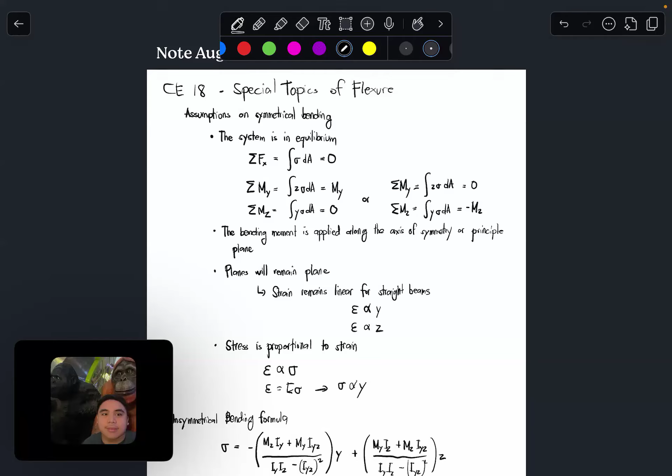So again, the assumption is that the system is in equilibrium. Meaning, if we were to analyze the stresses occurring upon a cross-section that is subjected to bending...

What happens is that if you integrate it with respect to its entire cross-sectional area, you'll be identifying fibers that are subjected to compression and fibers that are subjected to tension. We know for sure that those two are opposing forces. So if you sum the stresses, integrated over the area, you'll have an infinitesimal amount of force. Integrate that, and you'll have the total summation of force.

Under bending, there should be no resultant axial force — pure bending is what's happening upon your cross-section, so there should be no axial force. Therefore, our first equation is always the fundamental one. I believe for all of the special topics of flexure, this is something we cannot violate: the system must always be in equilibrium in terms of summation of forces.

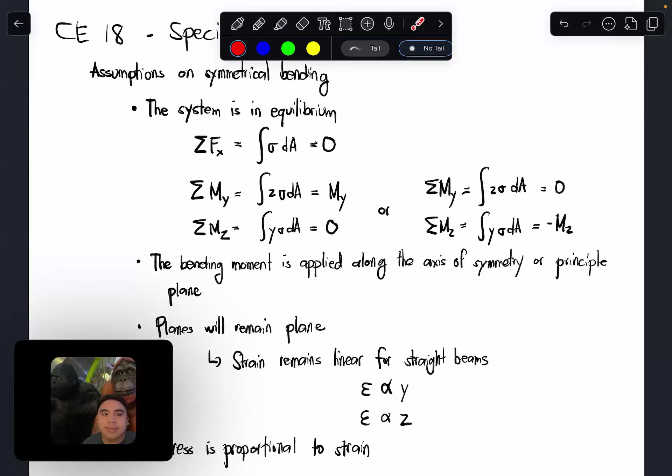Symmetrical bending involves the bending moment being applied on the axis of symmetry — for example, if your axis of symmetry is along the z-axis... or along the y-axis, whichever is the axis of symmetry.

If that's your axis of symmetry, and if your bending moment is only applied at the axis of symmetry, when you sum moments — considering z as your moment arm and sigma dA as your force — the collection, the culmination of the contribution of the stresses, should result into My.

On the other hand, since our bending moment is applied on the y-axis, if we sum moments along the z-axis, now considering y as our moment arm and sigma dA as our force, these should cancel each other out and eventually you'll arrive at Mz equals 0. In case the y-axis is your axis of symmetry, it's possible for both to apply.

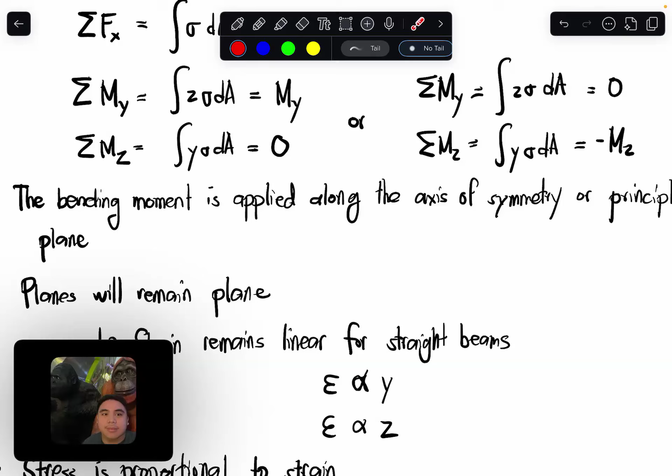On the other hand, if we sum up the bending moment along y, granted that the z-axis is our reference axis of symmetry, what we get will be equal to 0. Similar to the previous case, the fibers on the negative z side will just counteract the fibers on the positive z side. So that's our definition of symmetrical bending.

But we know now that we started in CE18 to depart from that assumption, that the bending moment is no longer applied along an axis of symmetry. Let me correct this - this is not the principal axis, this is our principal plane. We'll go back to this.

Another assumption would be that planes will remain plane after bending, if we translate that for straight beams. So clear emphasis on straight beam.

Knowing the Euler-Bernoulli formulation, our strain is determined to be proportional to its distance from the neutral axis. So that's what we mean when we say planes will remain plane and strain remains linear. It's a function of distance from the axis of symmetry.

It can either be, if our bending moment is along z, this is our proportionality - strain is proportional to its y distance from the neutral axis. Or if your moment is applied along y, your strain is proportional to its distance from the z axis. Lastly, stress is proportional to strain.

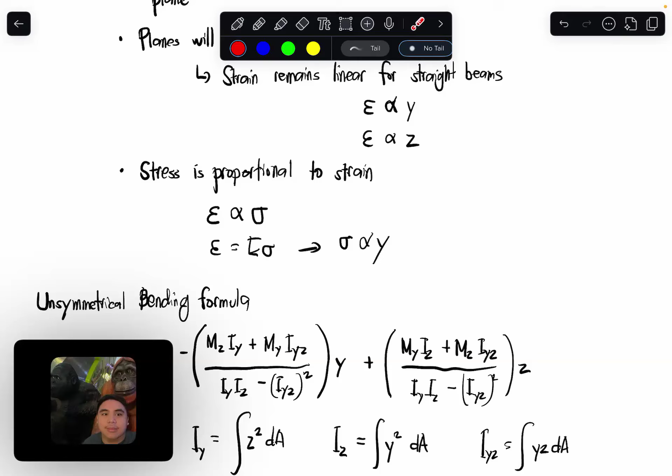As we deal with today's lesson, we'll cover unsymmetrical bending while also touching upon inelastic action. So when stress is no longer proportional to strain, what happens to our formulation? That's what we want to ask. So with these four assumptions, that's what constitutes our symmetrical bending.

Now, we have previously discussed this part in CE18 two weeks ago - this is the unsymmetrical bending formula, this very long equation. If you're given a cross-section, and again when it's not just along y and z that you're applying the bending moment, you can break it into its two orthogonal components, while at the same time it's not along the axis of symmetry or the principal plane where the bending moments are applied.

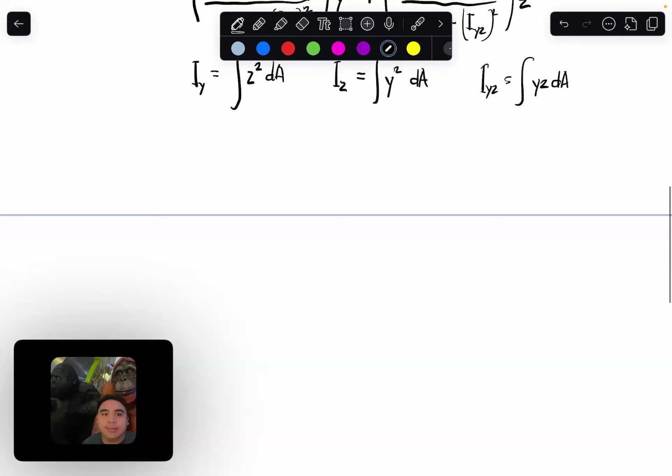Let's go back to translational transformation, which will result in the parallel axis theorem for both the moments of inertia and the product of inertia. So our translational transformation - the new axis y prime will be equal to y plus some displacement along y, or say you have z, which is z plus displacement along z.

So this translational transformation would result in the parallel axis theorem, where IY prime, our translated plane, will simply equal IY bar, which is our centroidal moment of inertia, plus dz squared times the cross-sectional area. Same with IZ prime, the translated plane equals the centroidal moment of inertia plus d squared y times A.

Similarly, we apply the same concept with the product of inertia: IYZ bar plus d sub y, d sub z, times A. So that's our translational transformation. But at the same time we also have rotational transformation.

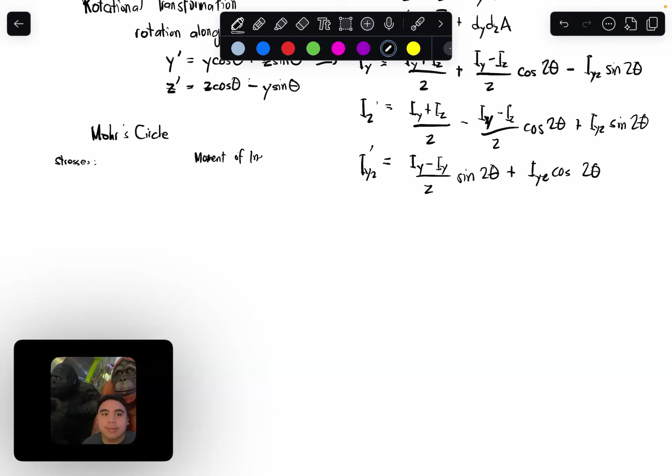Let me point out the key distinct difference between stresses and moments of inertia. For stresses, the particular difference is: this should be negative, this should be positive, this should be positive, this should be negative. The consequence of that, in the way we draw the Mohr circle on stresses originally from ES102, is that this is our normal stresses, and downward is the positive connotation for shear stresses.

Whereas when moment of inertia is what we're discussing, this is our moment of inertia, Iy and Iz. Then our product of inertia is upward like this, so this is our Iyz.

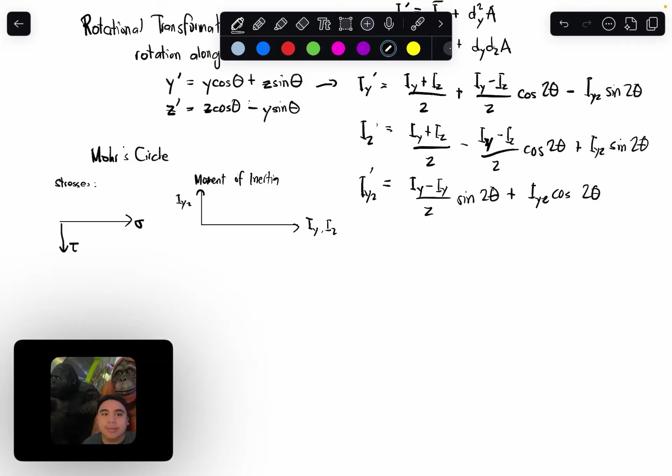But the manner of rotation still remains: counterclockwise is positive, clockwise is negative. So again, our definition of counterclockwise rotation, if we identify the positive x-axis here, the positive rotation is counterclockwise, then the negative rotation is clockwise.

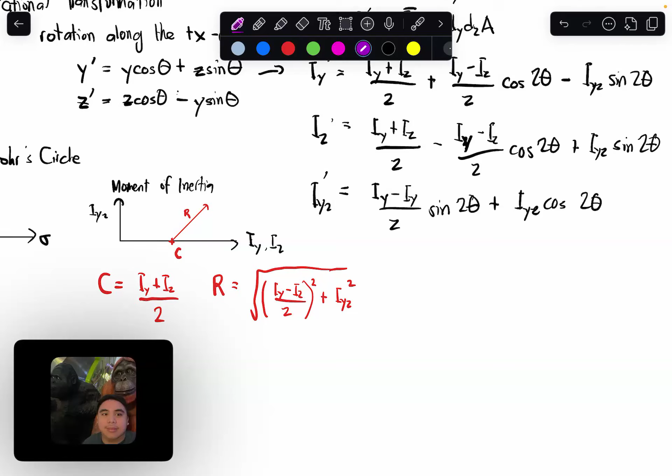And just like in our stresses, we also need to identify the principal plane. The principal plane is identified if either it's an axis of symmetry—automatically, once you identify the plane as somehow an axis of symmetry, you're dealing with a principal plane—or if the product of inertia diminishes to zero.

So we'll find this if we were to draw our Mohr circle right here, and see where our Mohr circle intersects the horizontal axis. So we are finding this point and this point, and the rotation you need now is what's called theta sub p, this is 2 theta sub p on our Mohr circle—the rotation needed to rotate R toward the horizontal. That's the angle you need.

And this theta sub p is already somewhat familiar to us. So theta sub p will be equal to—let me check this—let me ponder for a while. So we have negative 2 IYZ over IY minus IZ. Wait, there's a mistake, this is supposed to be tangent, not square root. So arctan of this one: 1/2 arctan of this quantity right here.

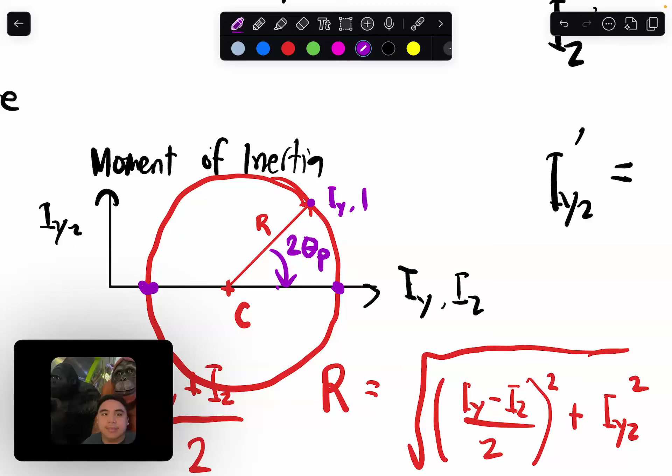Just in case na ito yung nangyari sa ating Mohr circle. Speaking of Mohr circle, as a bit of recap, this first point right here is yung ating IY, coupled with positive IYZ. Then yung opposite side niya is yung ating IZ na coupled with negative IYZ. So in this manner, in-establish na natin na si Y yung ating abscissa, si Z yung ating ordinate. Yung principal plane natin is identified through this axis of symmetry, kung saan IYZ is equals to 0.

Alam naman natin yung pag-interchange between these two concepts. Alam natin na kapag nasa axis of symmetry tayo, automatic yung ating product of inertia ay magiging equal to 0. Pero there are some instances na hindi natin madaling ma-identify kung nasaan si product of inertia natin, kaya hindi mo ma-identify kung nasaan yung ating axis of symmetry. So hindi straightforward yung pag-alam kung saan nagsi-zero si product of inertia.

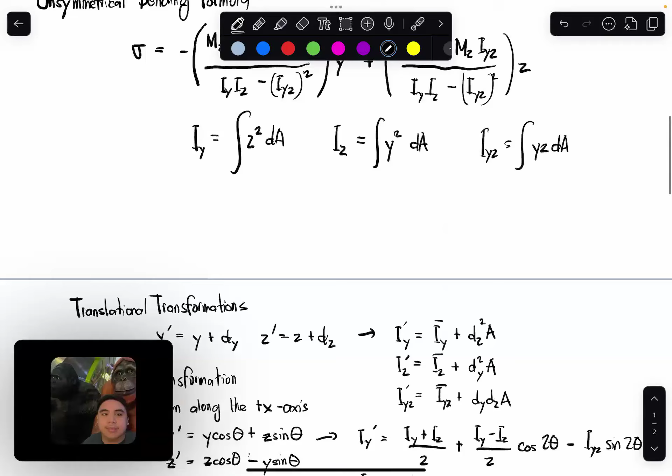At ngayon, we arrive at the notion ng ating neutral axis. Yung neutral axis natin, per definition, is the plane on which any values, kung ano yung nilagay mo na values ng y at saka z, automatic magiging zero yung ating bending stress. So ito ay dapat maging equal to zero.

And to visualize this, kung paano natin dinederive yung formula, i-imagine mo kailangan yung plane. Unahin mo yung plane, meron kang y, tapos meron kang z dito. Yung y mo is yung abscissa, z mo is yung ordinate. Parang meron kang ganito, so yung neutral axis mo din will be identified by some angle beta.

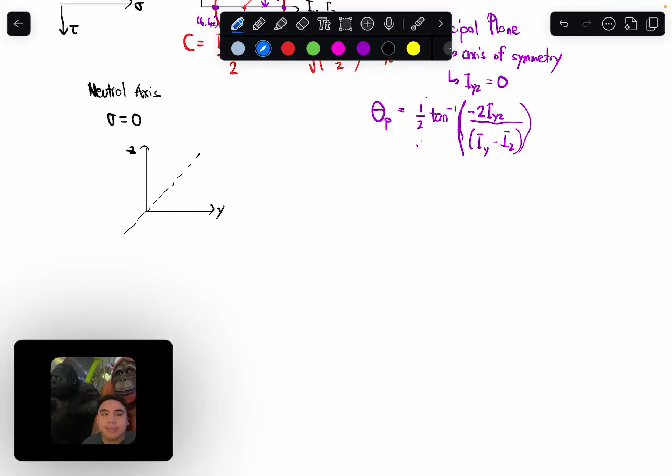Ngayon, depende kung paano mo i-define yung beta. Sa study guide, yung beta ay from the positive z towards y, so ito yung in-identify niya na beta. For many of the exercises naman, as long as sinasabi mo kung saang axis nag-originate siya, maski kung positive y yan or kung positive z, okay lang naman din.

So paano mo ngayon makukuha yung beta? Beta can be obtained by knowing, so palitin natin, ito yung beta mo ngayon, then i-imagine mo na siya ay isang right triangle. Meron kang right triangle right here. Ngayon, what you've determined is ito yung opposite, ito yung adjacent mo. Yung coordinate niya along y is yung opposite, yung coordinate niya along z is yung adjacent.

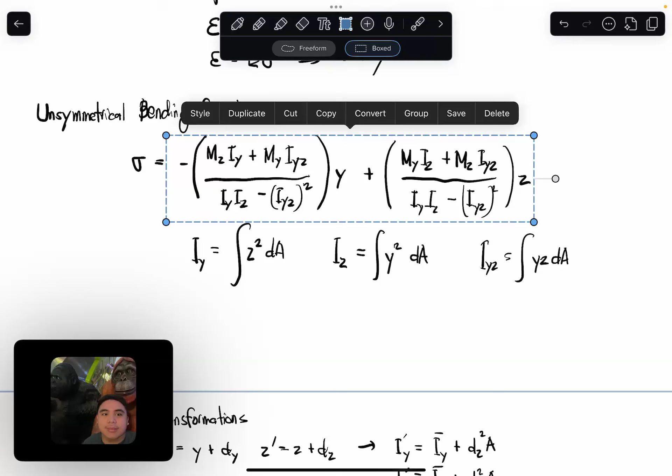Knowing yung tangent formula, meron kang tangent of beta is equals to y over z. So parang from this moment on, kailangan mo lang ngayon i-program yung sarili mo paano mo ma-manipulate itong equation na to such that yung nasa left-hand side ng equation ko ay magiging y over z.

Babalikan natin to. Again, per definition, gusto natin na equal to zero yung ating bending stress. So through some manipulation, copy ko na lang para alam natin yung thought process, paano ba siya nangyayari down the line. Meron kang 0, at ito ay malilipat lang sa kabila, magiging positive siya. Tapos gagawin ko is yung coefficient na kasama ni Z ay i-divide ko with respect on both sides of the equation. Pero prior to that, ang pwede ko nang magawa is i-multiply both sides by the denominator ng fraction. Itong buong term na to, since pareho lang naman sila ng denominator, pwede mong i-consider na nag-cancel out na. Therefore, kahit yung numerator na lang pala yung ima-mind natin dito, yung mga numerators niya. Divide natin both sides by the numerator na kasama ni Z dun sa equation.

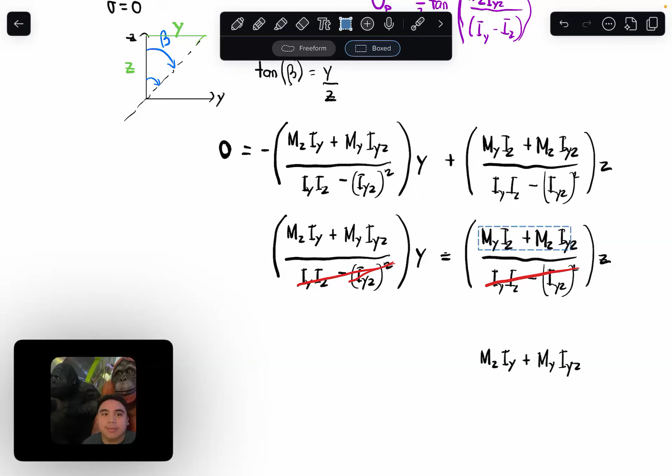So if we were to do that, mangyari lang is meron ka nito, copy, paste, then baliktad pala, dapat pala ay y over z. Yung numerator pala ni y, yung i-divide natin on both sides of the equation. Tapos ito ngayon ay mapupunta as numerator dito, numerator sa dyan, equals to y over z. So ito ngayon yung ating formula na kailangan nating ipagsama dun sa nakuha natin dito, itong tangent beta na ito.

So kapag gusto natin makuha ngayon si beta, all we need to do is to get yung arctan ng nakuha natin na term. So ito, yung arctan nito will be yung ating beta.

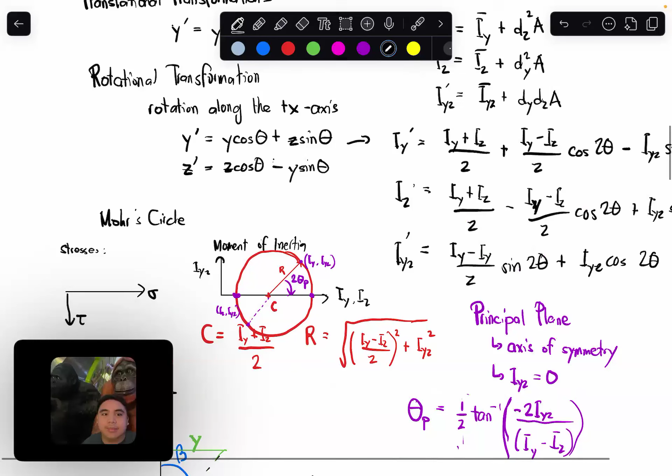So you have two options when dealing with unsymmetrical bending. You take the plane as it is. You obtain the moments of inertia along the Y and Z. We also get the product of inertia. You plug everything in, all of the coordinates, then you'll get a value for sigma.

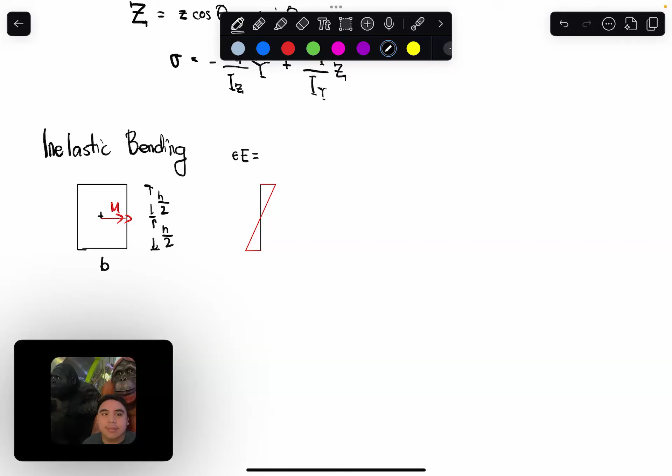Our strain diagram will look like this. Then with all the formulations we've done, we know that within the elastic limit, epsilon times E equals sigma. If we convert this strain into stress, it remains the same proportionality, so you have epsilon compression, epsilon tension, and this becomes sigma tension - the maximum tensile stress, plus the maximum compressive stress.

And the definition of our neutral axis doesn't go away - it's where our strain is zero, and at the same time where our stress is zero.

Per definition from ES 102, we get MY. So assuming, sorry, let's do this along Z. So this is the Z axis. So you have MZ over I... let's make this M sub Y. But let me remove the Y first.

Let's go back to the key definitions we learned from ES 102, for example, we identify Y as the distance from the neutral axis. And I NA is our moment of inertia along the neutral axis.

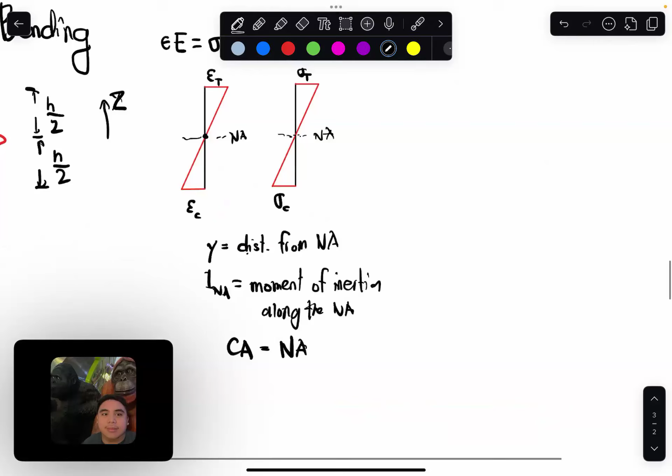But at the same time, we know from ES 102 that our centroidal axis is coincident with our neutral axis if and only if the following is satisfied: stress remains proportional to strain. We'll flesh this out later. But for now, we're still dealing with a doubly symmetrical rectangular cross-section, so in this scenario, the neutral axis remains at the centroidal axis. But otherwise, let's continue the thought.

So let's take a detour into the notion of abscissa and ordinate. For example, given this: you have X, you have Y. So X cross Y yields positive Z, meaning the direction of Z is away from the page. This just means that counterclockwise rotation is positive and clockwise rotation is negative.

If in case this is flipped - you often encounter this where this is Y and then suddenly it becomes X - when this happens, the vector normal to the plane will be directed towards the page.

So in this manner, yung direction ng rotation mo, halimbawa with reference sa theta p, sa beta, yung pag-identify mo will be in a manner such that yung counterclockwise rotation will be negative rotation from our perspective, then yung clockwise rotation yung magiging positive na rotation. Kasi halimbawa sa book makakita tayo ng ganitong example. Meron kang ganitong plane, makikita mo ito si Y, ito si Z. So sa unsymmetrical bending ganito yung orientation mo. Y cross Z yields positive X, at yung Y cross Z natin yields a counterclockwise rotation, at yun ang pointing away from the page yung direction ng ating positive na rotation. So tama lang na yung abscissa mo is Y, then yung ordinate mo is yung Z.

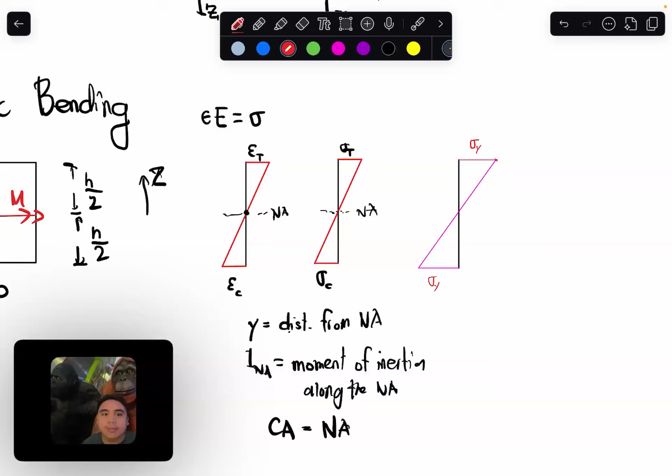So meron kang sigma y dito. Yung nagko-cause ng ganitong instance, mabilis lang natin siya ma-define kasi we know that this is h over 2, or we say na kunwari y max, we identify this to be equal to y max. So yung farthermost fiber, typically proportional naman talaga siya doon. Kung mas malayo siya from the neutral axis, mas malakas yung bending stress na nakukuha. So ito yung ating neutral axis.

So now that we have identified yung y max, meron kang sigma y dito, tapos equal to yung moment na gusto mong malaman, which later papanghalan natin, y max over INA. So kung i-jumble natin to a little bit, such that yung M na gusto nating ma-determine, meron kang sigma y, which is your yielding stress, INA over y max.

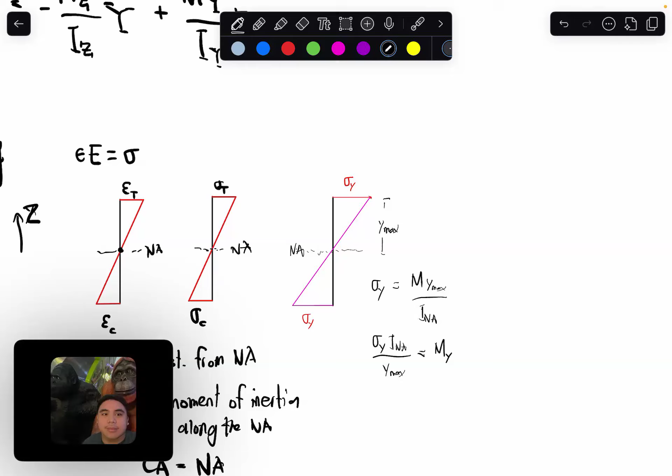This is equal to what's called yung yielding moment. So, yielding moment is any bending moment when applied upon a cross-section will cause the farthermost fiber to experience the yielding stress. Yun yung formal na definition mo. So basically, ito na yung boundary na any greater than this, any greater than M sub Y, ay magiging inelastic na yung action. And we roll back again dun sa notion ng inelasticity.

So we go back to our stress strain diagram. We have here our stress, we have there yung strain. We know na within the proportional limit, stress will remain linear to strain right here. So ito yung idealization natin.

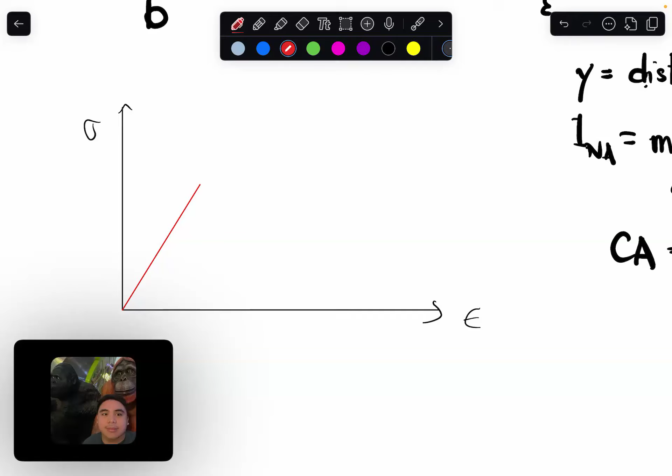Then there comes a point, na-discuss na a little bit, na merong residual stresses, medyo magko-curve ng ganyan, then magre-reach ang ultimate stress, magkakaroon ng necking, then magbe-break siya kapag umabot siya dun sa ultimate, so bababa yung relationship between stress and strain. So ito ay yung tinatawag natin na proportional limit, at ito yung ating ultimate stress right here.

Pero for CE18 and CE151 purposes, we idealize itong behavior ng steel natin, or any other material. We are establishing what's called a perfectly plastic material. Kapag perfectly plastic siya, what we are assuming is once it reach yung ating proportional limit, yung sigma sub y or yung epsilon sub y, so yan yung ating proportional limit, any further than that, constant na siya.

So nagpa-plateau na siya, and yung plateau na yon is yung sigma y. Ibig sabihin, any strain that is greater than epsilon sub y, kapag kinonvert mo siya to stress, it will always result in sigma y.

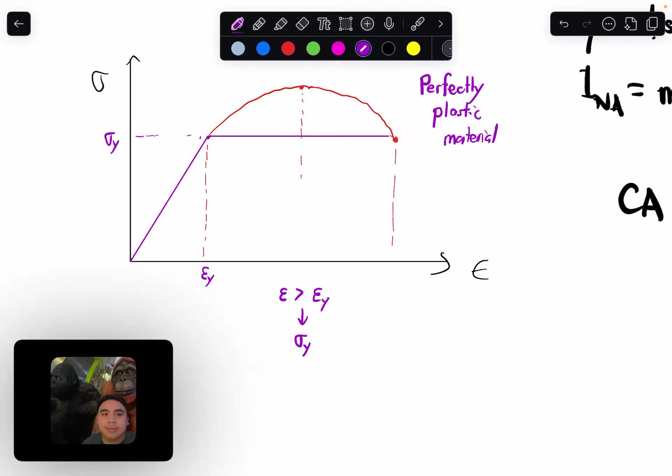So yun lang yung sinasabi natin kapag perfectly plastic material. Babalikan natin to. Now we are proposing na yung same na rectangular cross-section natin will be subjected under bending action, such that yung magiging resultant na strain distribution niya across your cross-section, even though if it is still linear, hindi naman na-violate yung rule, so kahit na linear yung relationship niya, yung strain mo ngayon dito, yung maximum strain is greater than the yielding strain. Similarly, since linear naman to, ito ay still greater than dun sa yielding na strain.

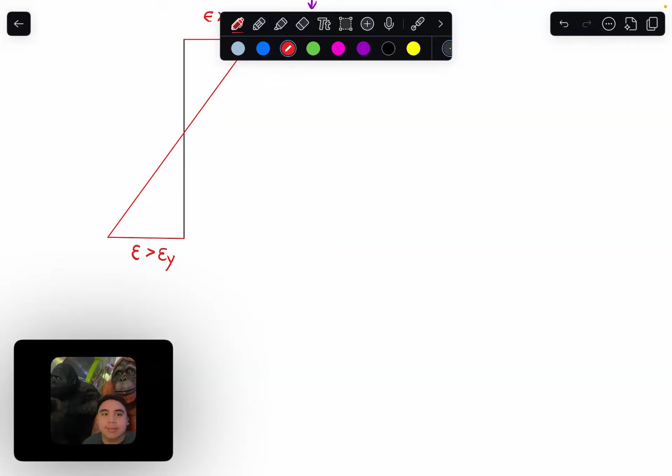So mas malaki pa rin yung strain natin. Sabihin natin na negative epsilon sub y, tas yan, positive epsilon sub y, it's still the same distance, pero meron ka pa rin H over 2 dito. Although not to scale ito. Sige, H over 2 right there. So meron kang maximum strain na greater than dun sa yielding na strain. So what to do at this point?

Kailangan mo lang muna i-identify hanggang saan dun sa mga fibers na yon yung nag-exceed ng yielding na strain. So sabihin natin na up to this point, ito ay yung magre-result to yielding strain. So yielding strain siya at this point, at the same time, at this point, yielding strain din siya. So ini-impose lang natin na alin pa rin yung magre-remain na linear, alin yung magre-remain na non-linear. So this is our strain distribution right there.

At kung ililay down natin yung manner ng conversion, kino-convert na natin siya to stress and strain. Babalikan lang natin tong ating stress-strain diagram. Ang titingnan natin is yung not in red, but rather in violet. So unahin natin yung farthermost point, yung very extreme na point. So yung nakuha natin na sigma is around dito.

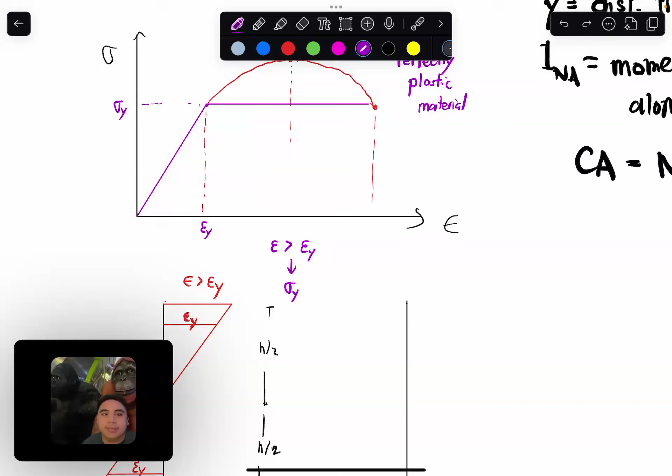Nalagpas siya kay epsilon sub y. So lagpas yung strain mo dun sa yielding na strain, pero sinabi natin na any strain that is greater than the yielding strain, if converted to stress, will remain at sigma sub y. So at that point, makukuha natin, sigma sub y pa din yung ating conversion. Similarly, for the rest of this portion right here, ganun din yung magiging manner ng conversion. It's still sigma sub y.

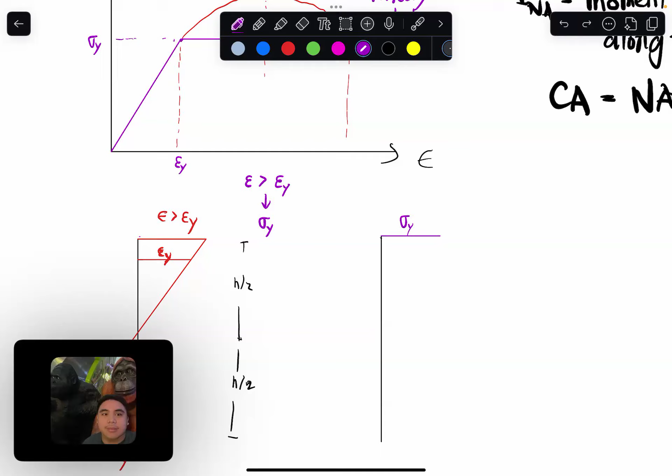So parang magiging constant lang yung sigma sub y natin for some distance right here. So for some distance, sigma sub y. And after that, magiging linear na yung relationship between stress and strain. So magiging linear na siya na ganito.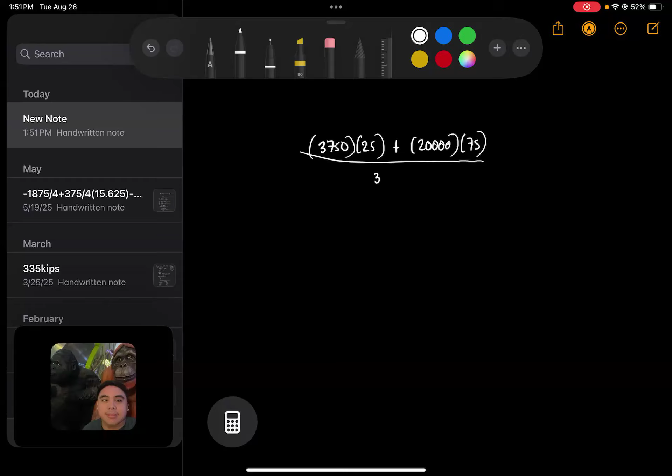Labo 3,750 times 25 plus 20,000 times 75 divided by 23,750. So ay equal to 67.105. So ito yung location ng ating centroid.

Lahanin lang natin yan. Next is to get yung moment of inertia. Unahin muna natin yung centroidal moment of inertia ng isa. We know that it has a height of 50, then a width of 170. So meron akong... sige, 75, sorry, 50, balikan ko lang to. Yun, 75 na.

Yun. 50, 75 times 50 raised to 3 over 12. Ito yung ating sa una. Tapos yung I2 natin ay equal to, so dito ko lang isulat para hindi malito si Apple Calcu na 400 times 50 cube over 12.

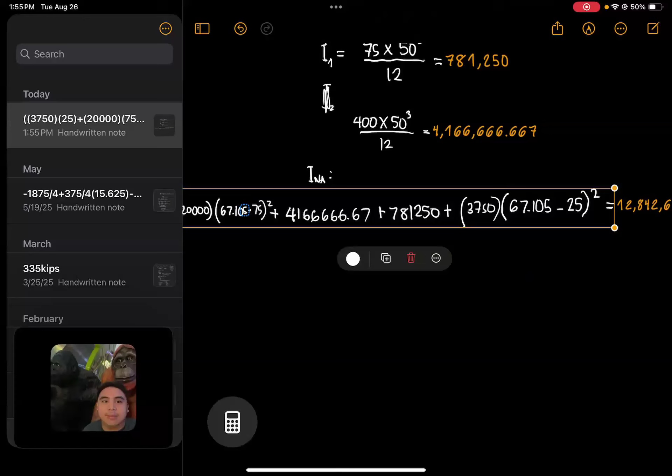Bitin na. Sige, dagdagan pa natin ng plus dito na 2,000, 20,000 times 67.105 minus 75 squared. So, saan siya equal? So, sana ma-detect niya. So, meron akong 12 million something. Yep, hindi ko makakopya. Ayun, 12,842 point.

842. Ano yung ano? Please give me the answer. Ayaw mag-zoom out. Damot ah. Aha. Sige, lagay ko na lang na ganyan. Na merong pang dalawang 600 yan. So, 12,842,600. So, assume lang muna natin na ito yung ating I NA.

Then, yung Y-max natin, na-identify na natin, actually, with the knowledge na meron tayong 67.105 kasi yung 67.105 is this one right here. Ito yung 67.105. Yan yung farthermost fiber actually from your identified na neutral axis. All you need to do is to plug that in. Sige na, isulat ko muna.

So meron tayong kailangan ma-determine na MY. So kung nakuha ko na yung location ng farthermost fiber, tapos nakuha ko na rin yung bending stress. So ay yung bending stress to be equal that of the yielding stress. Tapos meron akong I NA dito divided by Y max. So I'll be plugging in 250

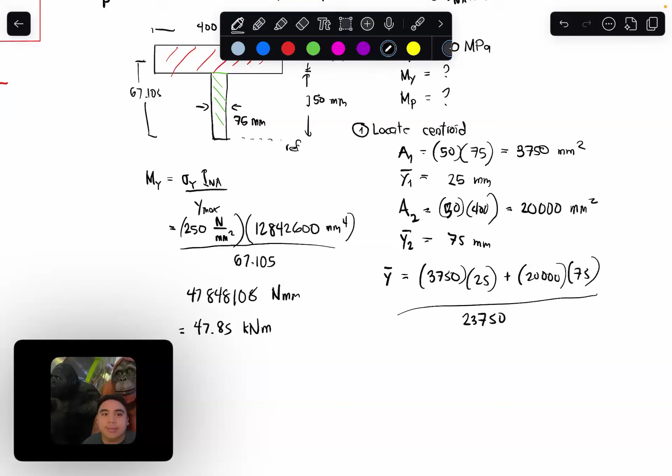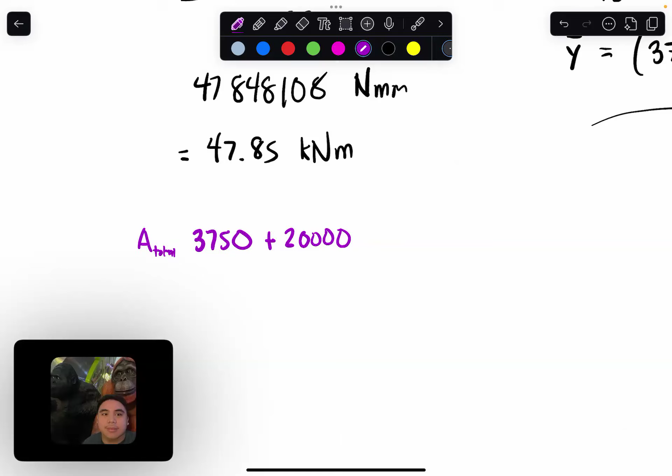Now, to the plastic moment, pwede ko na siyang diretsuhin in such way na kailangan ko lang identify alin yung magbibigay sa akin ng cut-off kung saan equal yung nasa taas na area dun sa nasa baba na area. If na-identify ko na 3,750 yung area ko dun sa baba, tapos na-identify ko rin na 20,000 yung area dun sa nasa taas, so ito yung area total. So kung gusto ko makuha pala yung hati nito, so kailangan ko lang hatiin yung 20,000 sa 3,750.

So meron akong, kailangan ko maka-achieve ng 1, 8, na ko na nga, calculate ko na. Baka makalimutan. 23,750 divided by 2. So 11875. So kailangan ko lang ng 11875 millimeter squared na area for my compression sa tension.

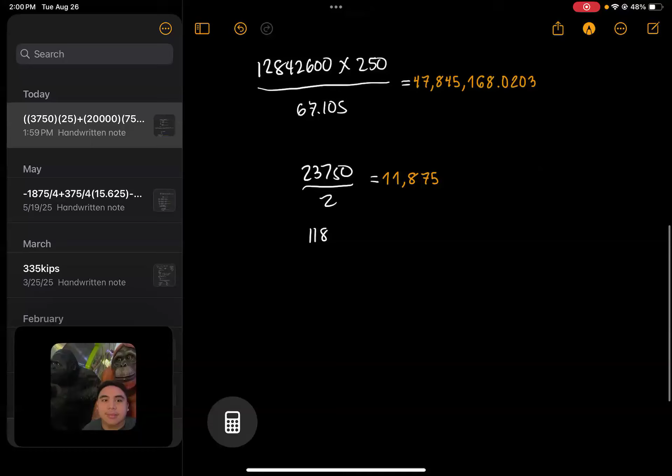Ngayon, ang tanong, nasaan yon? So all I need to do is to divide that by 400. So kung dinivide ko yung 11875 sa 400, ito 29.688 yung magiging distance niya, so ito na yung magiging bagong location ng aking neutral axis.

So meron akong 29.688 millimeter as my location of what's called the plastic neutral axis. So meron akong plastic neutral axis dyan.

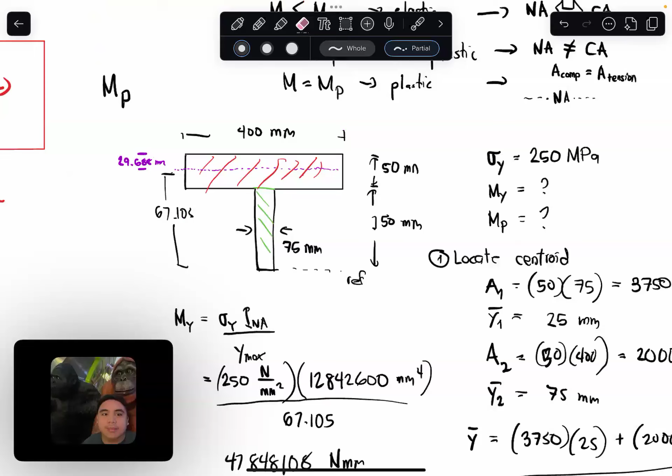Na-hati ko siya, so babalikan ko lang to. Tingnan ko lang kung pwede kong i-delete ito. So yan, yung hati-hati natin.

So meron akong area under compression right here. Tapos meron din akong area na under tension naman dito. At yung nasa baba, under tension din. All I need to do is identify the stress block.

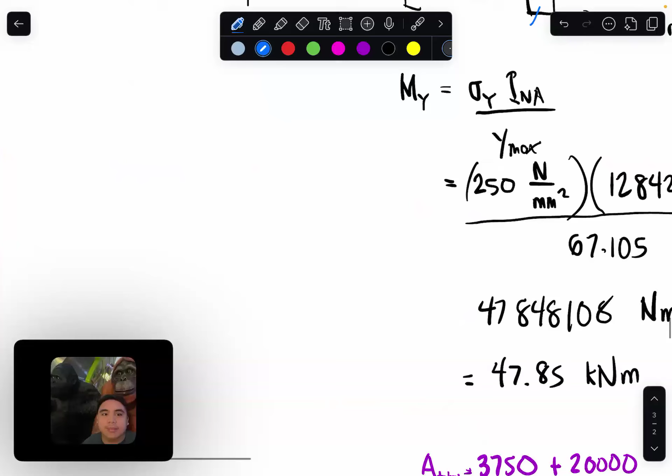Try ko lang na ipakita ito sideways. So meron akong force dito na compression. Okay lang naman kung baliktad compression tension. Meron ka nito, F1. Tapos meron ka rin yung sa malaking part. Tapos meron ako ditong F2. Tapos meron akong F3 dito. Okay, so si F1 ay makukuha ko sa ganitong paraan.

F1 will be equal to yung total area lang niya. So 11875 times sigma y, times 250 lang. So meron na akong force 1.

Force 2, ang makukuha ko dito, bawasan ko lang yung 20,000 minus 11875. Parang hindi na ako mahirapan sa pag-compute. So 8125. Meron akong 8125 times sigma y, total area times sigma y.

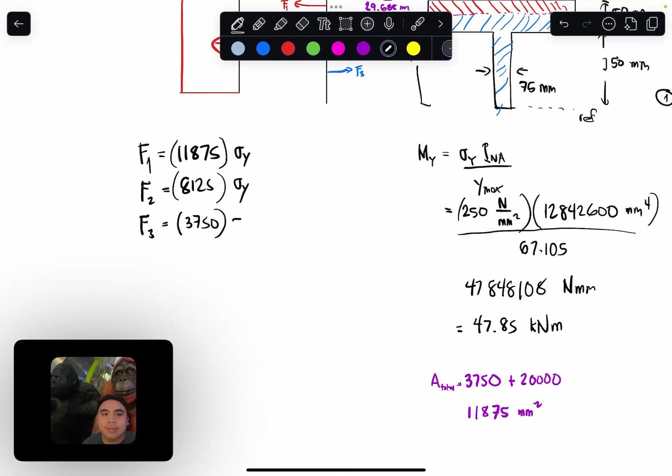Then F3 ko, meron akong 3750 times sigma y. So yun lang naman yung mga forces ko. Area times yung yielding stress pag plastic moment.

Now, on to dun sa computation ng moment arm. So yung distance na to from the neutral axis, kung yung violet is yung neutral axis, dito yung force natin, kalahati lang ng 29.688. So meron akong 14.844. Ito yung aking distance from the neutral axis.

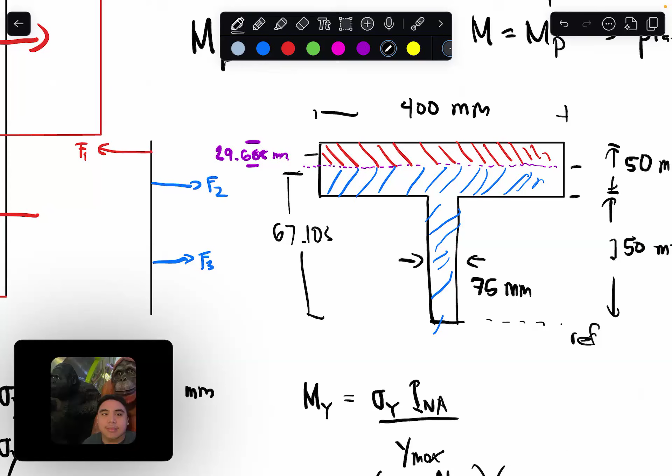On the other hand, itong in blue ko, meron akong 20 point, so kalahati nun. Sulat ko lang yung equation. 50 minus 29.688 divided by 2. Ito yung distance niya, moment arm. 20.312 divided by 2, so 10.156. 10.156 millimeters.

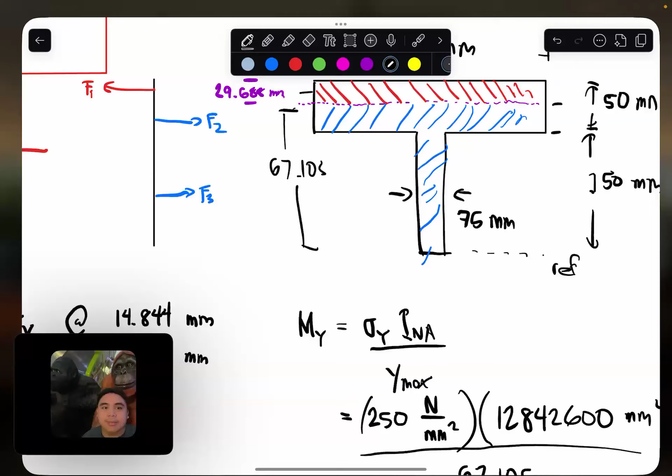Then lastly, ito ay nasa midpoint. So meron akong 50 minus 29.688 plus 25, and I'll get 43.31. 43.31 mm. So meron akong F1, meron akong F2, meron akong F3, meron na rin akong moment arm.

All I need to do is sum everything. Ito lang yung katumbas niyan, Y sigma dA. Meron lang akong 11875 times yung moment arm, 14.844 times sigma Y. Then meron din akong plus 8125 times 10.156 times sigma y, mamaya na natin ipapa-plug in yung sigma y since common term siya. 3750, then meron akong 43,312 sigma y.

So meron akong 11875 times 14.844 plus 8125 times 10.156 plus 3750 times 43.312.

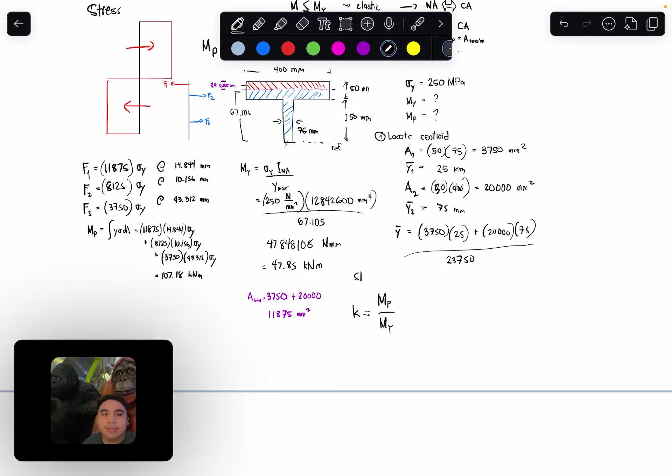Now, yung last na gusto kong ma-discuss is yung ratio between the plastic moment at saka yung yielding moment ko. Ito ang tinatawag na shape factor. Magko-culminate pa to later on kung i-examine natin closely itong term na to, kapag pwede natin siya ma-represent into what's called yung section modulus, yung S sub x — yung moment of inertia divided by yung distance ng farthest fiber. So pag minultiply natin siya sa yielding stress, makukuha mo na yung yielding moment. Meron tayong i-impose na tinatawag na section modulus.

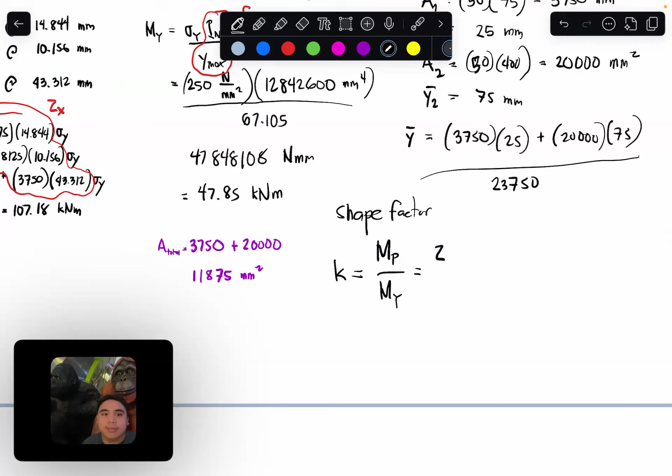On the other hand, meron din tayong factor out. Lahat to naka-factor out yung sigma y. Ito represents yung tinatawag na plastic modulus na kapag minultiply mo kay sigma y, makukuha mo si M sub p. So yung shape factor mo actually can be further reduced, kung na-factor out yung sigma sub y, as the ratio between the plastic modulus and the section modulus.

So meron akong 107.18 dinivide ko sa 47.85. So meron akong 2.24. Yan, 2.24 yung nakuha ko. Take note na yung shape factor is independent of the stresses. It's only dependent on your cross-section itself.